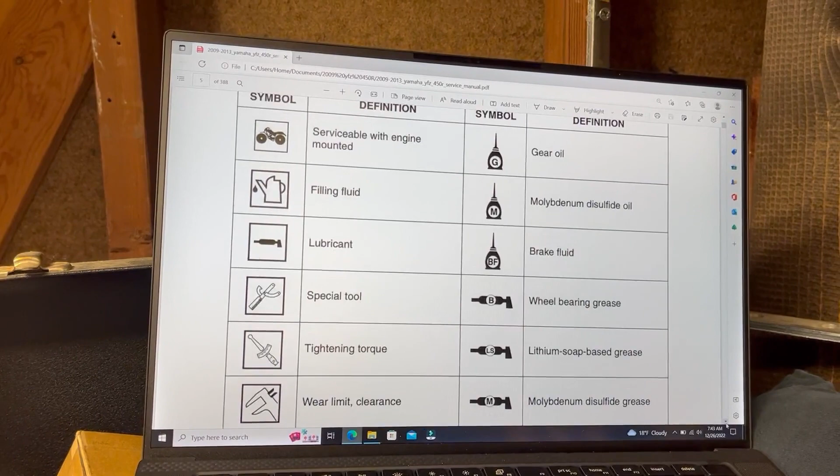So we got general information. Basically, there's no way of getting through this build unless you've done it a million times without having this breakdown. And it tells you piece by piece and every single torque spec for the engine.

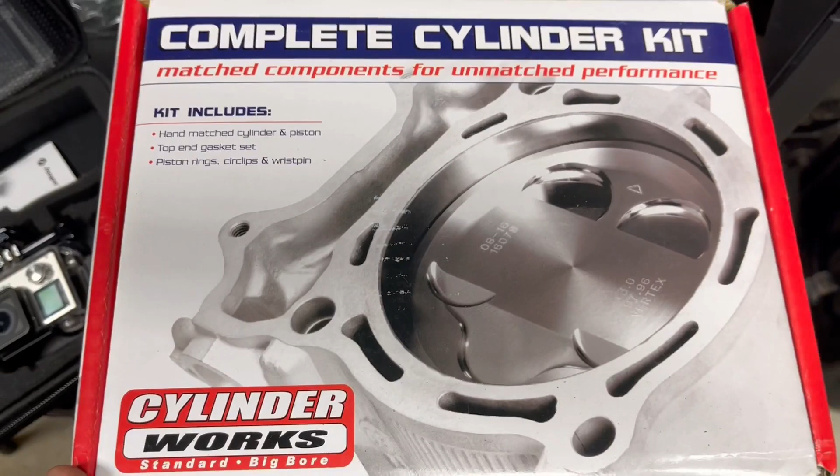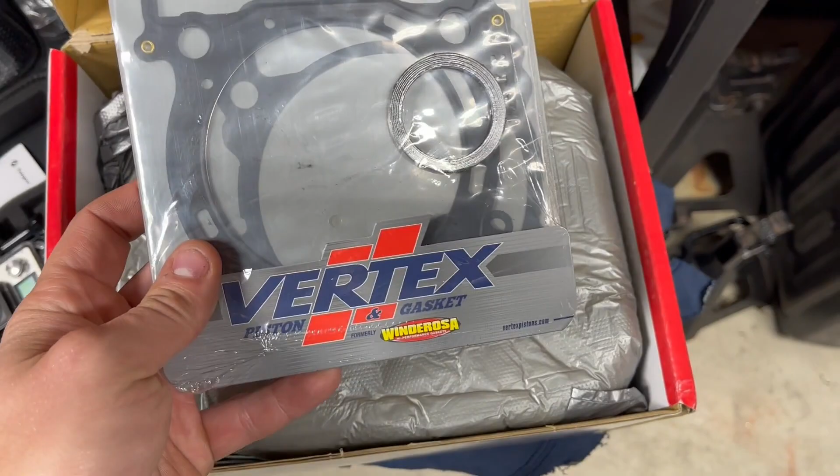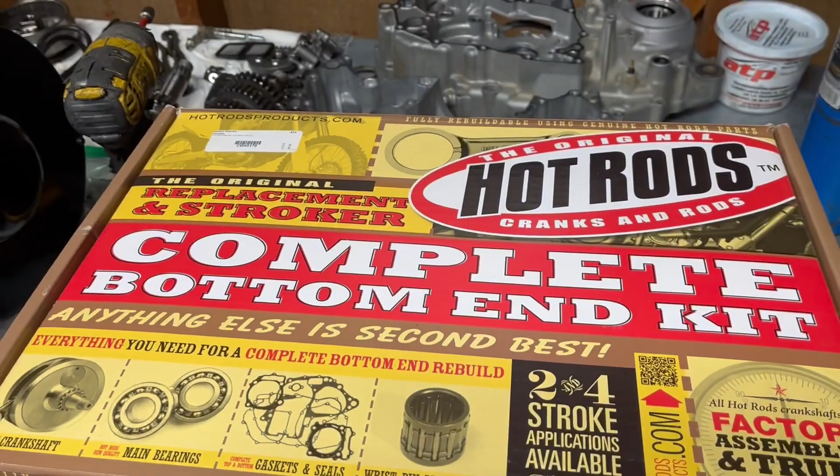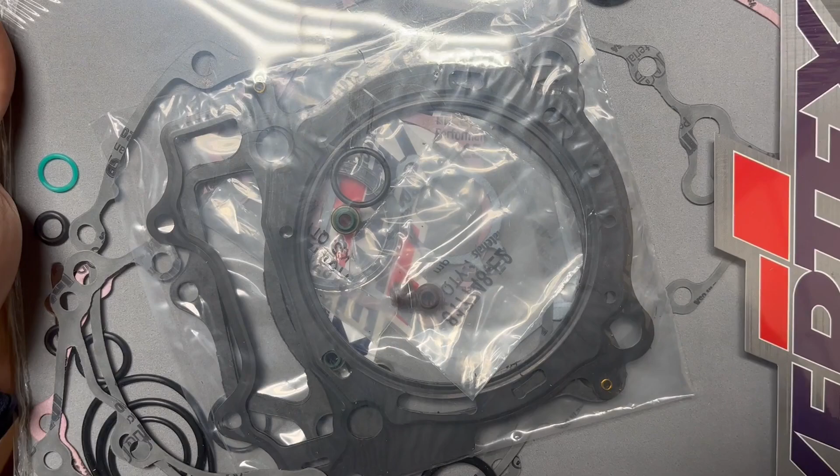All right, here we go with the Cylinder Works top end kit. Everything looks pretty nice. I already opened this up. Got the top end gaskets. Got the jug in here. Looking pretty nice, pretty snazzy. And the pistons in there too. We got a few of the same type of gaskets in here, along with the rest of the gaskets for the rest of the engine, O-rings, all that stuff.

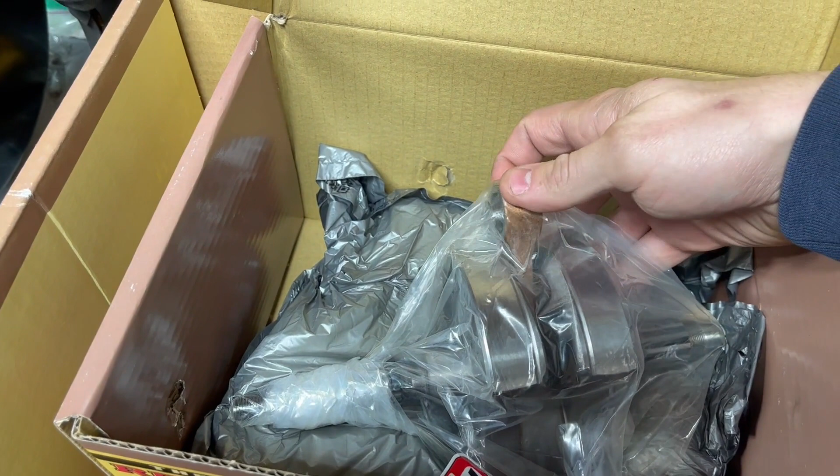And let's see, pull the crank out of here, huh? So this one wants to. This one's looking a little bit more correct. Looks like it's gonna move freely. At this point in the build, we are installing the bearing retainers. Scott just popped in a seal right there.

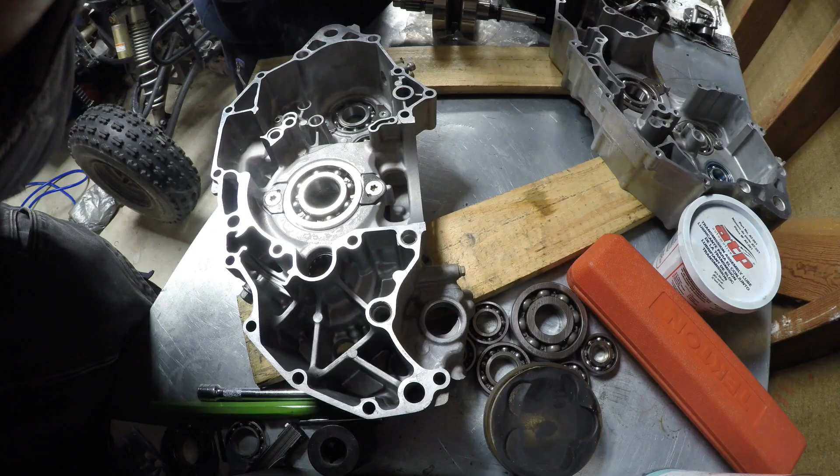We just heated up the crank bearing, dropping the crank in at this point. Crank's in, brother. Sure it's in the right way? I fucking hope so. No backing down now.

At this portion, we're installing the transmission gears. Any surface that rides on a bearing, we're putting assembly lube on, just so there's no friction on startup, getting everything going.

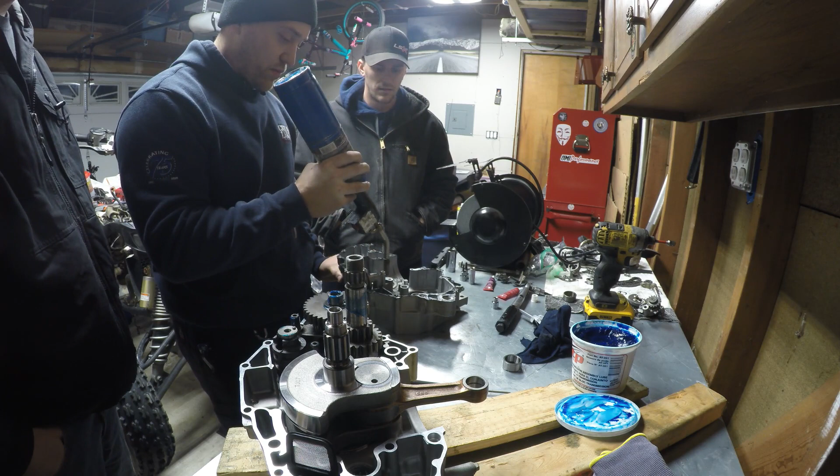Trying to be pretty meticulous at that point there on putting the silicone around the edge of the case. There's not much metal to work with there, and you don't want a bunch of excess running to inside the case. There's a couple of oil passageways also that you want to make sure you don't build up a bunch of silicone on as you're running it around the edges there.

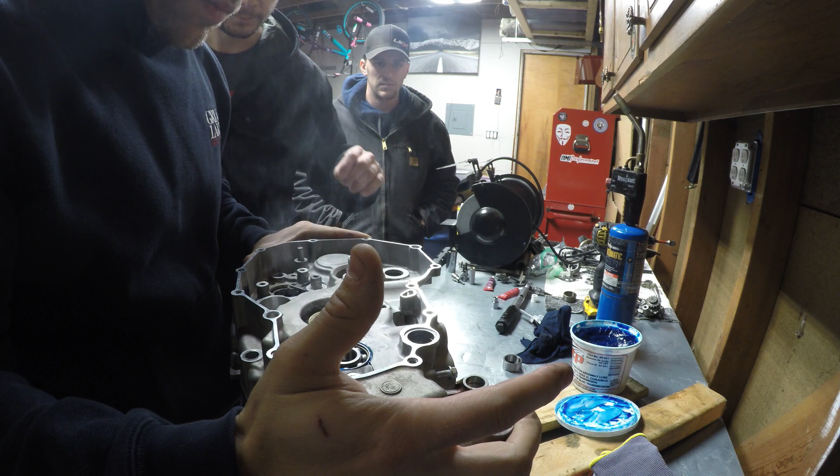Just heated up the other bearing. Might have put a little too much heat on that one actually, but it ended up slipping in there really easy. Everything fell right into place.

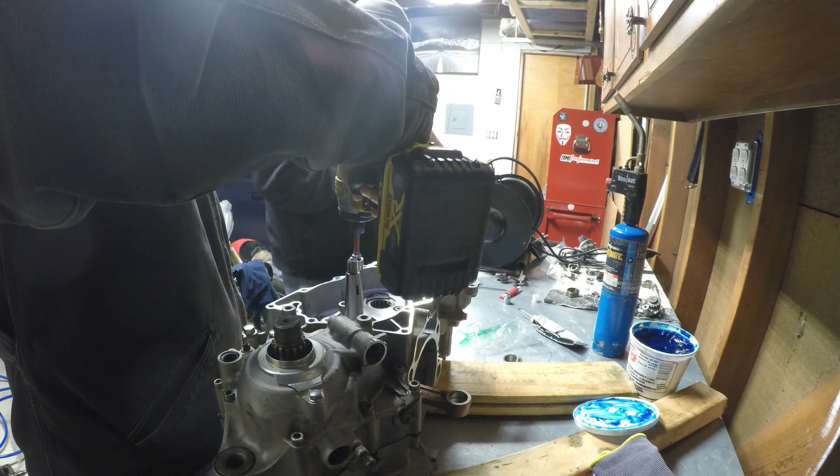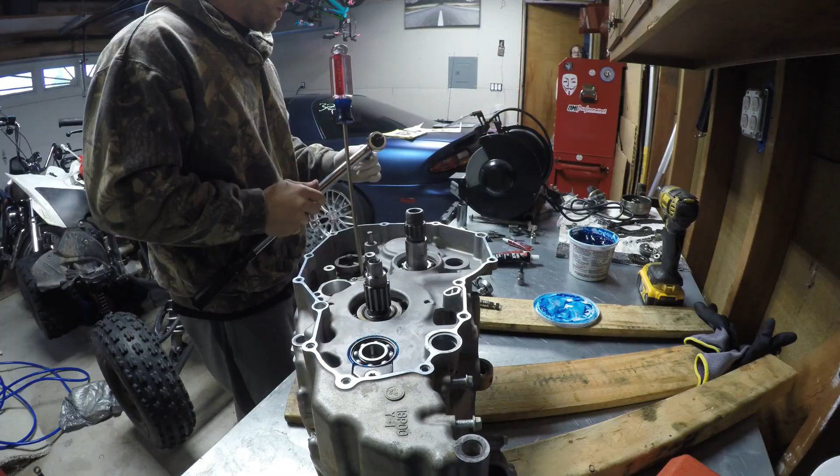This area of the build is the shift mechanism. Right here I'm lubing up the bearing and setting in the counterweight for the crankshaft. On those two big gears right there, there's a couple dimples, one on each gear that you line up. That nut there, it has a washer that's got a metal flap on it. You bend over after you torque it down.

Right here on the crankshaft sticking out there, there's actually your, which you just skipped right by, but your timing chain gear, and then the generator, which I just torqued down. At least part of the generator. The other part is in this side of the case right here that I'm dropping in.

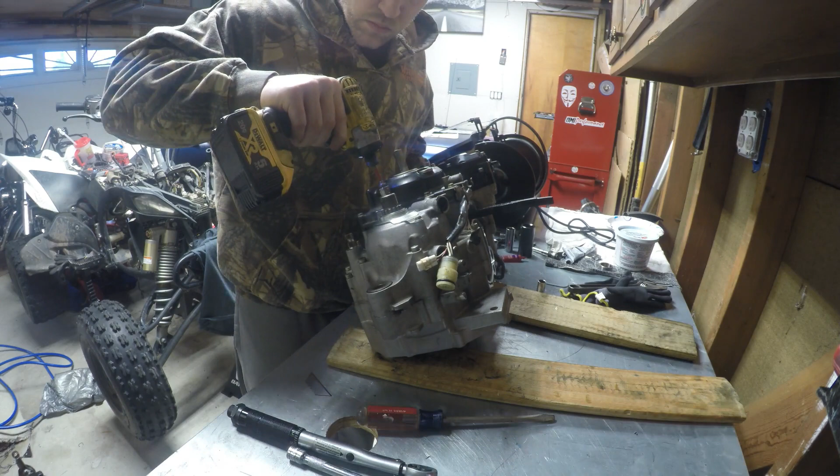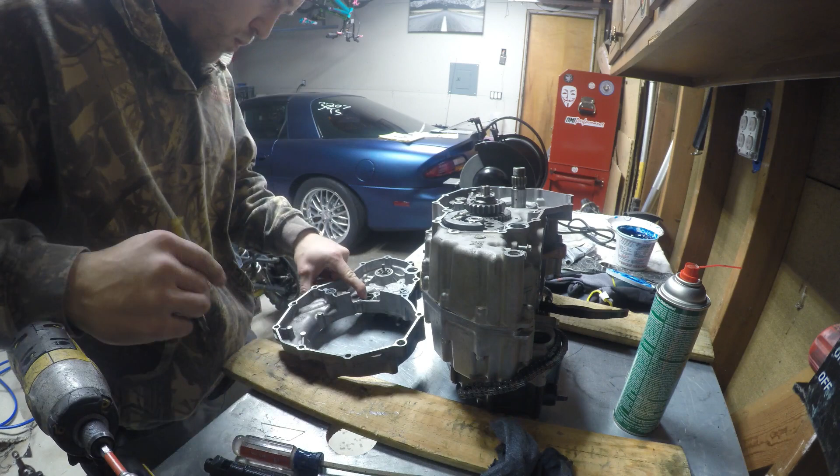There's a couple of seals in this part of the case. I pulled them out. There's probably a snap ring or two in there as well. Ended up pulling all the old stuff out and installing new seals everywhere inside the whole engine. We're gonna continue on and torque all these bolts down in a star style pattern, bouncing around the case.

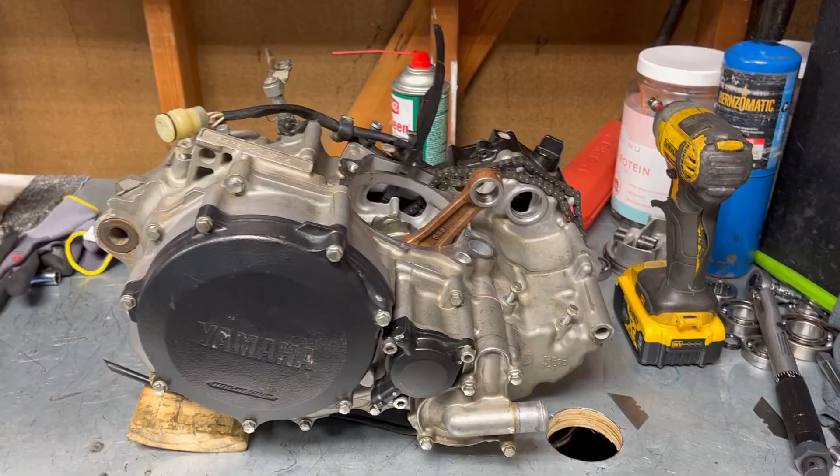So I made a little bit of a boo-boo here. I assembled this whole lower end, and this is the clutch rod, and it was telling me to put it in way earlier than I tried to, and basically it's too late at this point. So I'm going to take you through why that is not wanting to go in there now, and we'll get that fixed and put back together. But for now, I'm going to have to take the clutch cover off and pull a few things apart to get to the bottom of that.

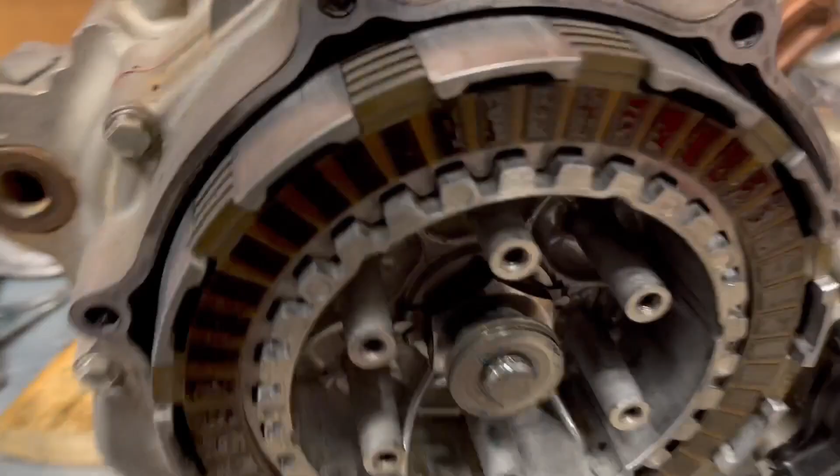Alright, so we got the clutch cover off, and then behind that is going to be this here with all these springs, and basically that's the spring-loaded part of your clutch. And you got your clutch pads here, and then now the center point here, which is what I was talking about. So if you were to pull this thing out here, you got this, and there's a ball bearing inside

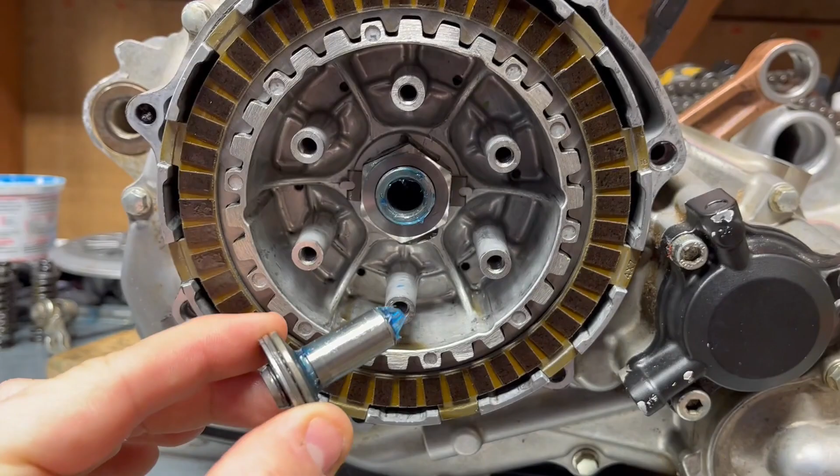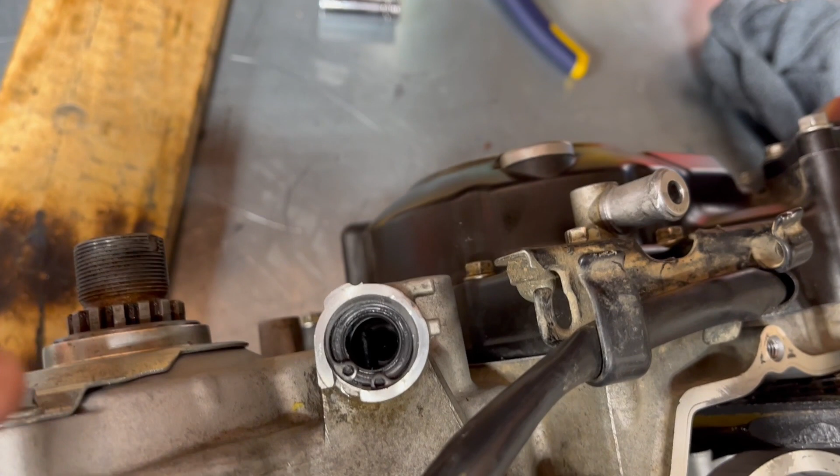there with a rod that goes all the way through the inside of the case to the part where, I don't know if you could see it down there. There's a little bit of a rod sticking out. You can kind of see it in the hole down there. Basically that pushes on that part of your clutch lever,

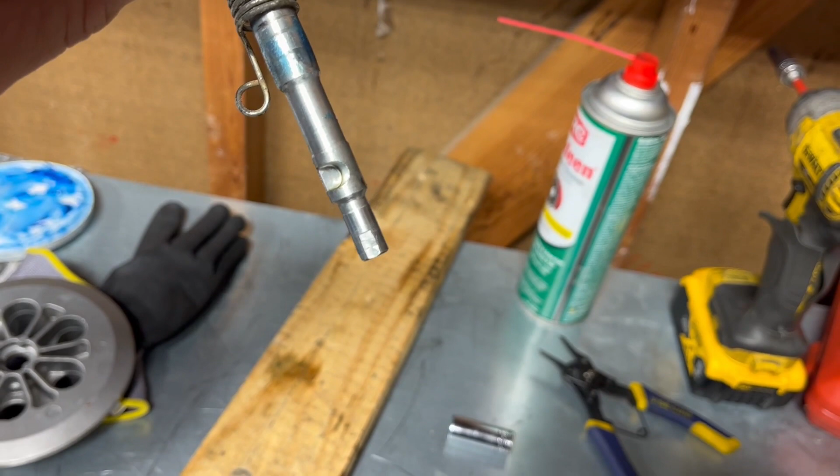and when you pull on your clutch lever, that's gonna push that rod into the, what do you call it, the pressure plate, and loosen up on the clutch to where it's gonna free spin. Once you let out of the clutch, that spring's gonna spring closed, and the clutch is gonna engage.